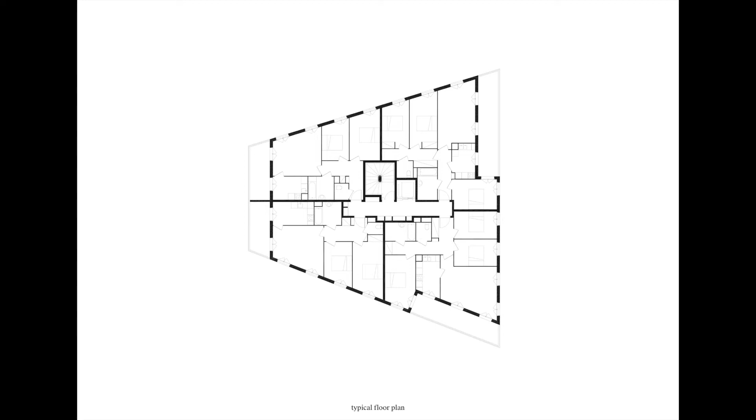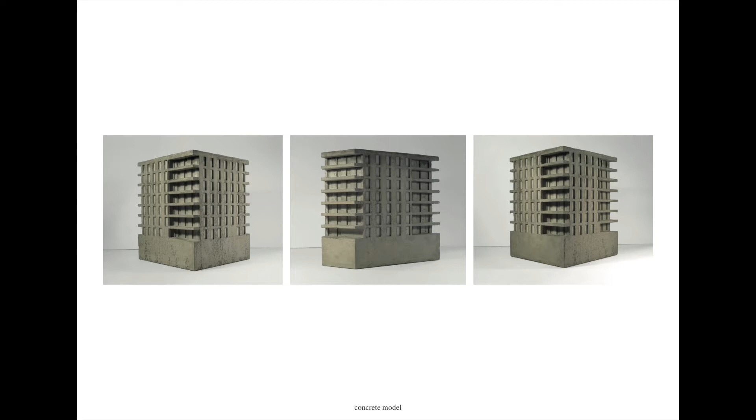And maybe, which is more important than the rest, this kind of intuition we had at the end of building this model, we said okay, let's try now to embrace and consider a little more. It was at the end of the project, a question raised at the end of construction. We said let's make a model that takes care of and considers a bit more the thickness of the building, and the fact that there's always something underneath what you build.

The process was to first look at what is traditional in the territory of Normandy, and to register the typical farmhouse that exists there. The way we wanted to abstract this object from this traditional form to another one was to double what we call la longère. Inside it, because of the new thickness generated by this duplication, we decided to integrate some interior protected outdoor spaces.

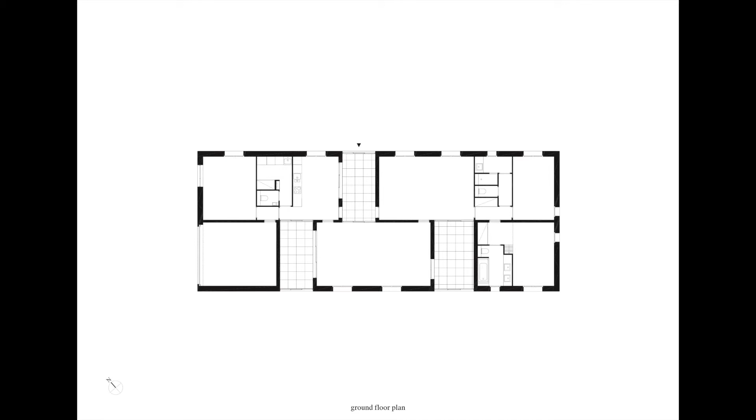The living room is now integrated and extended with these three outdoor spaces. This is an image from an outdoor space, a veranda totally protected from the outside, because in Normandy the weather is not really ideal for unlimited outdoor space. Facing the living room, on the opposite side, is another outdoor space.

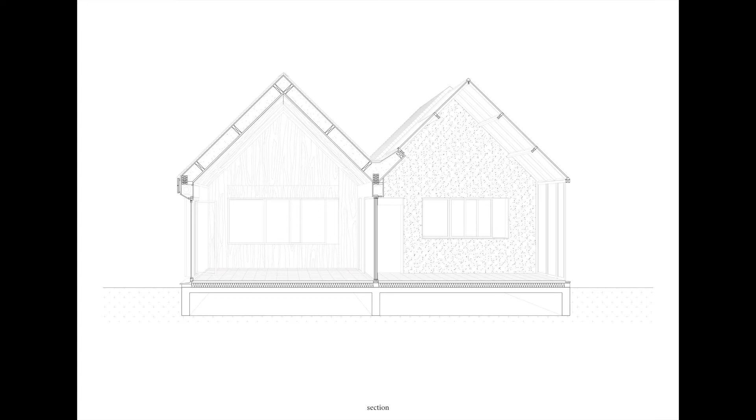Here, the building is built with a wood skeleton filled in with hemp, a material we're using more and more. In this case it wasn't far from the construction site, so we found a balance between using material that comes from not too far away—let's not be too local, because it very rarely comes from underneath the building, but not too far either—and the fact that the duplication of the building offered some newness, a step further toward abstraction. This balance between abstraction and the way a building belongs to a place through how it's built was maybe the beginning of a discussion that is now more and more important.

Another building is a 15-apartment building where construction is just about to begin, in Paris 18. Here we showed this axonometric view. Below are concrete slabs, concrete columns, concrete slabs and concrete columns. On top, which will embrace and surround the entire building, is an envelope, made with a secondary structure of wood skeleton, again filled with hemp.

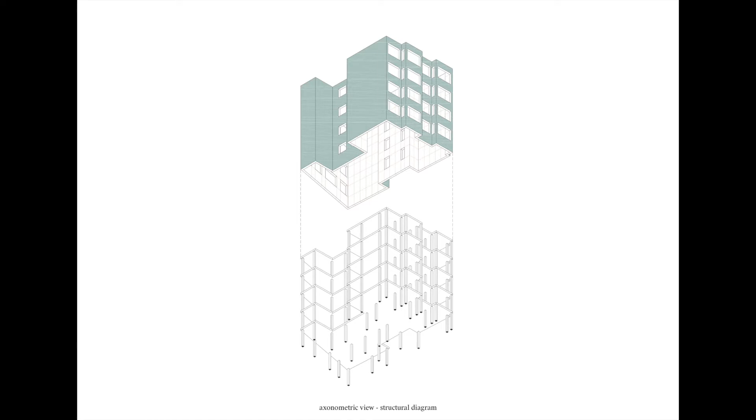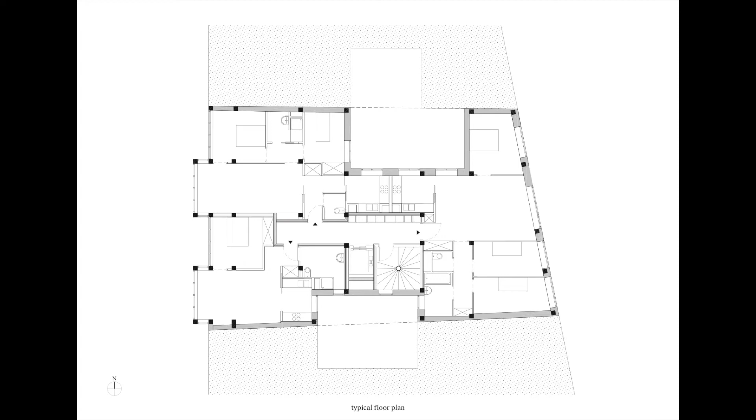And at last this building that we built, 17 apartments with stones, the construction was just finished last December. It's in Paris 11, Rue Oberkampf.

And of course, when we talk about the stone, all that we just said had more or less real implication with this notion of soil, of ground. And now, with the stone, we are more and more involved and interested, and this background is clearer and clearer for us. So to start this journey and explanation about the stone, we have to enter inside Earth, inside the planet.

So this is an image of the entrance of the quarry, a limestone quarry. This entrance we have was during the construction, right before the construction began. So we are keen on knowing that we have our ground above our heads.

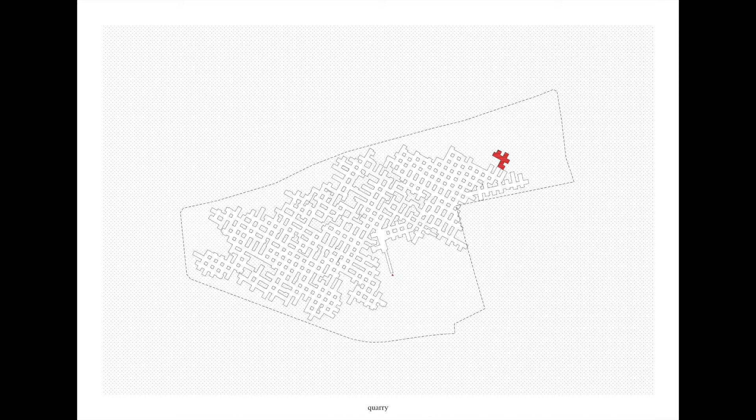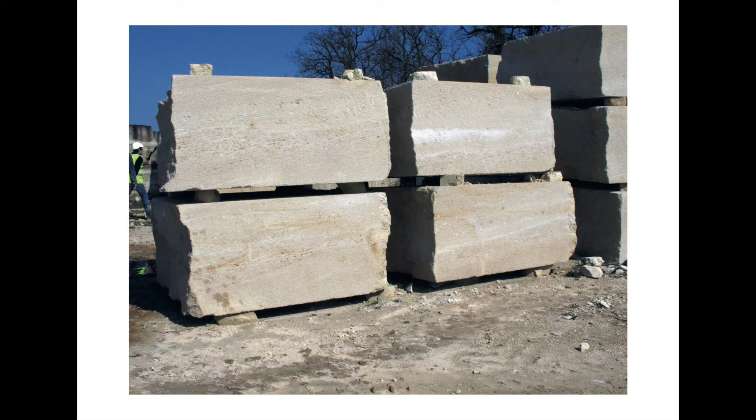And then here, the blocks that we did choose, this one for the prototype that we did for the facade, not exactly for the facade at the end. But what we are interested in here is this very particular moment you have with the stone—this material is very powerful for that—the fact that when you look at these blocks, it is somehow still part of the ground. It's still a fragment of the soil that has just been extracted, but also already in our minds somehow columns and lintels and jambs. This immediacy, this very obvious switch between that state and another one, is very fascinating, we have to say.

And it reminds us that we can also have the same kind of reading when you look at this image that we all know, just like the one with Mies at the beginning. But here it's somehow the opposite—you can still see the old ruins and the old temple, but you can also see at the same time the fact that the rocks began to be soil and begin to be ground again.

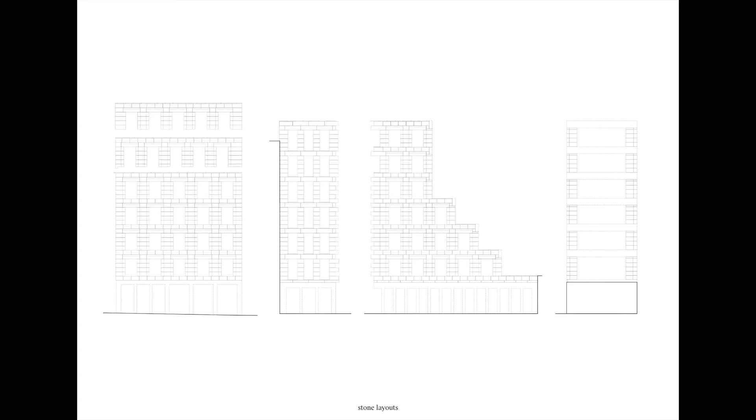The four stone layouts of the four facades—this one is the one on Rue Oberkampf, and the three other ones are facing the inner courtyard inside the plot. This was the discussion we had at the very beginning when we started working with a contractor, Entreprise Bonnel, which is a contractor from Angers, roughly in between Paris and Angoulême.

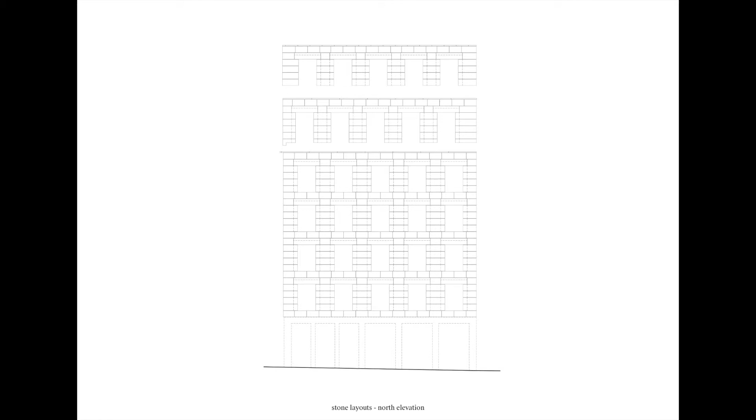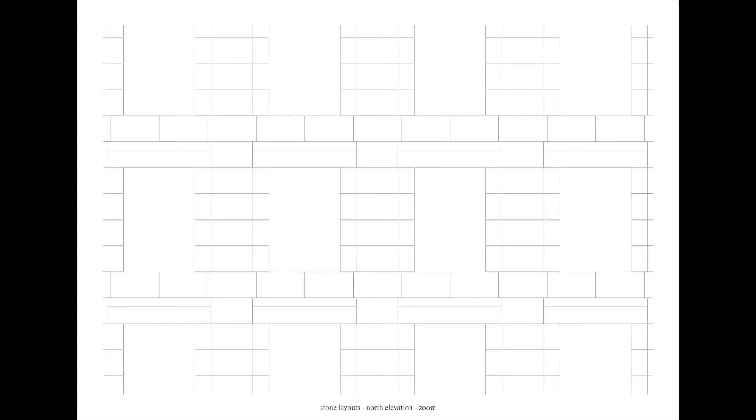And we realized—this is quite naive, but we realized when we started working with stone—that when you start laying out the different pieces and elements in the facade, you have to make a choice: either make a wall, meaning continuity, and then make holes inside the facades for windows, or on the other hand make piles and just stack stones one on each other. This second option is the one we decided to follow.

So here you can see the different elements. You have stones here, the lintel, another stone that links the two lintels—so that's one stone—and the stone belongs as well on one window and another one, and on another one. As you can see here, you have the piles, so four blocks for one pile, and two lintels held on one pile.

And the other process—this offset that we decided to do—again, to feed this ambiguity between being a column or being a wall, we decided that we should subtract a piece of matter to reveal the assembly, and the fact that at this very moment you have this ambiguity between the lintel and the column. So in this image, you understand that here we have the pile and this subtraction of matter—we get matter out, we cut off the material, rather than adding, as we will see in the image after.

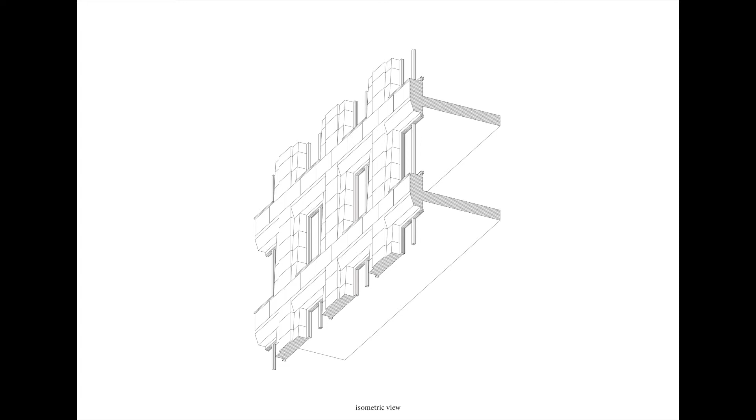We feed and illustrate this ambiguity that always exists when you build with stone between the wall and the column. Here we have this understanding of the old Haussmannian tradition, emphasizing the position of the elements constructing the window. Traditionally you'd add material to create a decoration on the facade, but we decided that in our times we should rather take material out of the construction to reveal and express this ambiguity between the column and the fact that we are a wall.

From above this time, because with this point of view you can more easily understand the situation of the building inside the plot. So an L shape with a gradin inside the plot to liberate and generate generous outdoor spaces for the apartments. Rue Oberkampf is here.

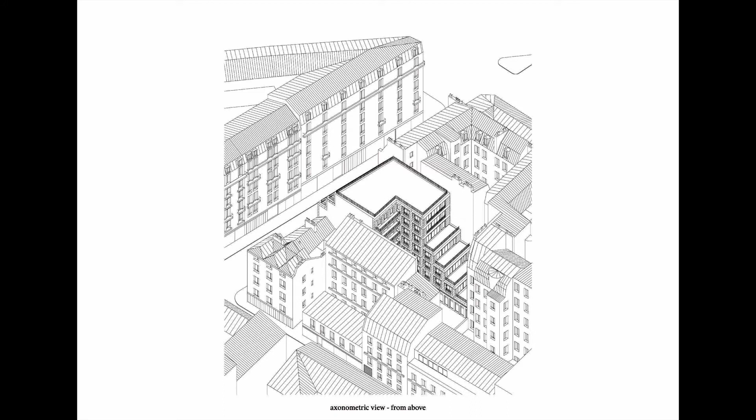The plan of Rue Oberkampf, with the gradin I was talking about, is organized in two parts. The first part has one typical floor plan made with a 3 bedroom apartment and a studio, and the other side on this floor has a 4 bedroom apartment, but each gradin takes a room out, so you start with 4 bedrooms, then 3, then 2, and then a studio at the top.

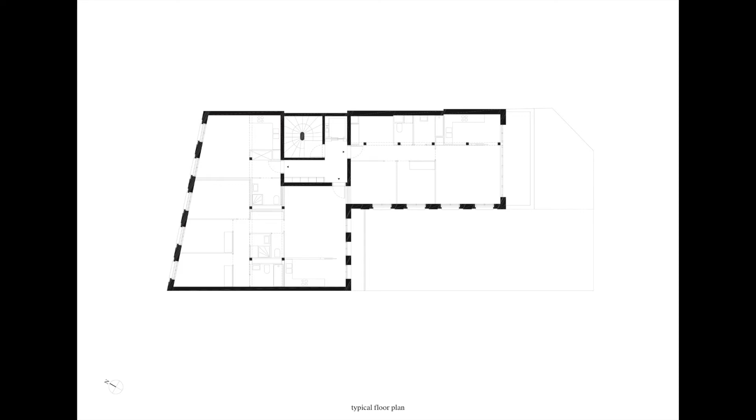Here we can see, before how it is built, we have these two structural lines with steel holding the massive wood floor plates that you can see here. So steel, the massive wood floor plates, and the wall made with stones at the end here, stones that are, of course, holding the building.

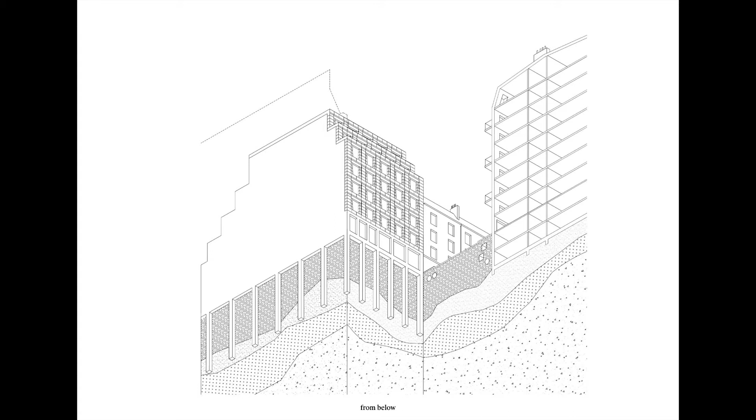Secondly, we thought it's interesting to keep a sort of dialogue between the stone and the concrete, and to maintain the possibility for both materials to exist and coexist together. This is something we're more and more interested in, saying that there's no much reason to reconsider this war that happened in the beginning of the 50s after World War II, where concrete kind of killed the economy of stone. We think a good manner for stone to exist today is to persist and coexist economically, but also in the way we think the building and the assembly.

And of course, the dialogue very easily exists when we sandblast the concrete on the basement, and it reveals the rocks inside, so you can very easily, aesthetically, provide some dialogue between the two materials.

And maybe a third reason was a more spatial matter. The way it's also very interesting to use concrete to develop some rooms and provide a better relation between the inside and the outside, which is something very modern, of course.

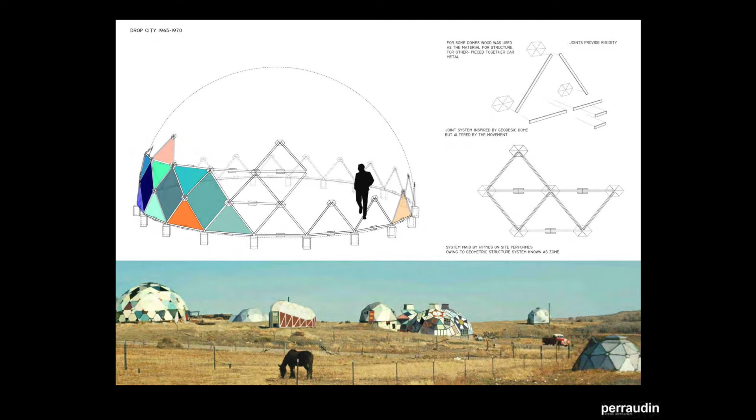In this way, I decided to work with André Ravereau, an architect who lived in the Sahara desert, and I followed him in his way of understanding situated architecture. He lived in the Sahara and built some houses, and he also received an award from the Aga Khan for his work. He built only 10 buildings in his life, but each one is a masterpiece.

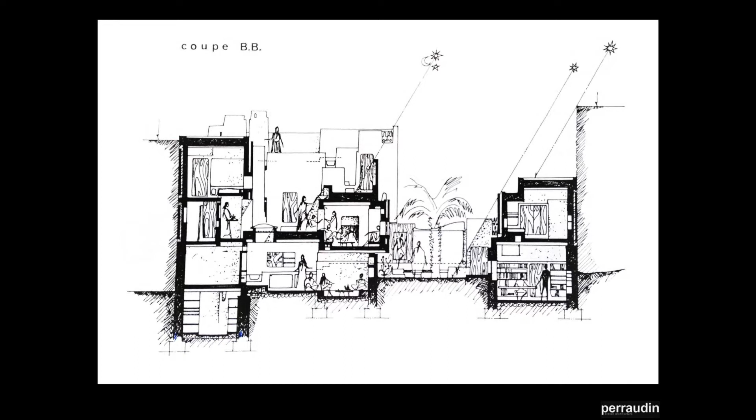I discovered with him the relation between climate, architectural form, and people, and how people lived in these houses. It was a very important experience for me as a student, not only because of the relation with natural materials - I will show you later why I came to build with only natural materials - but I think this experience was very important for me.

I think everybody here knows the problem of climate change, and how urgent it is to react against this problem. All the scientists now agree it's a problem caused by industrial development, which is responsible for CO2 emissions and pollution on the earth. It's because of this consciousness that I decided to build buildings with only natural materials, and I will explain why.

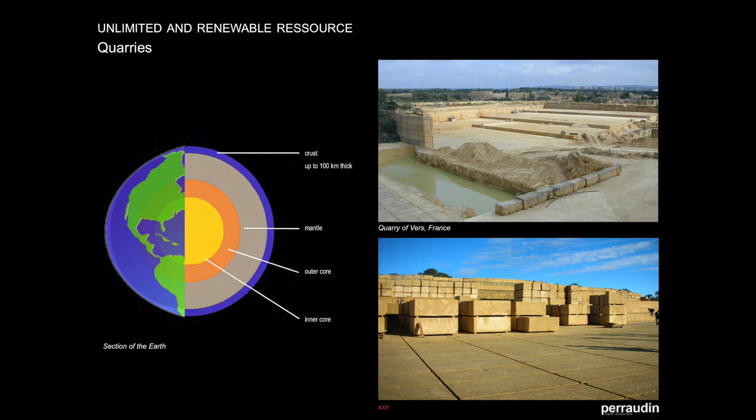And I decided to begin the process with quarries in the south of France. These are the quarries near the Pont du Gard, and you can see the huge blocks they cut at the quarry with a machine, very simply.

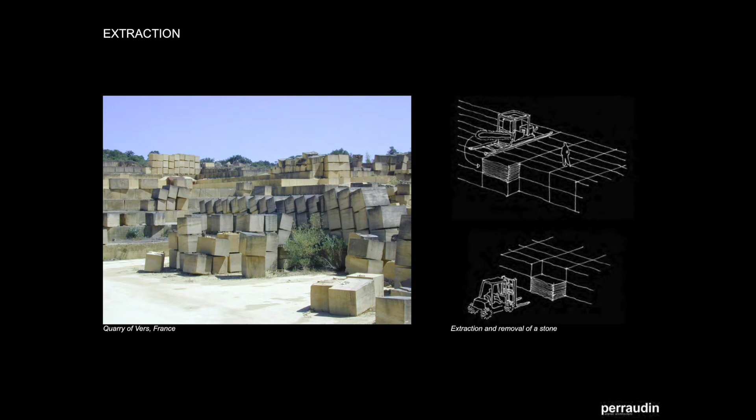You can divide the stone into smaller pieces. It's a huge block defined by the size of transportation, and then you can resaw this block into a smaller one to define a module, and it's with this module that I decided to compose and build my first building.

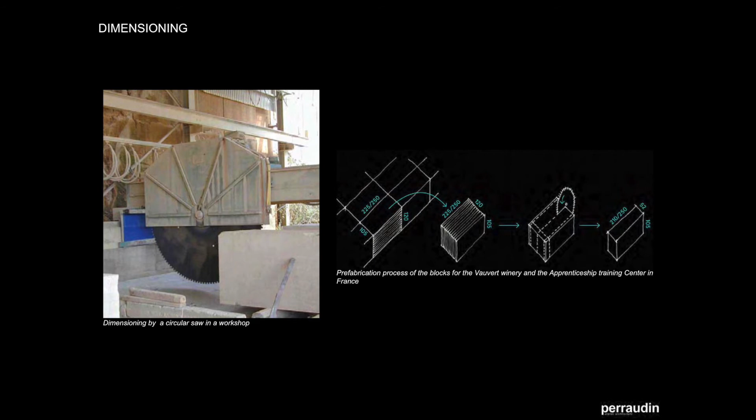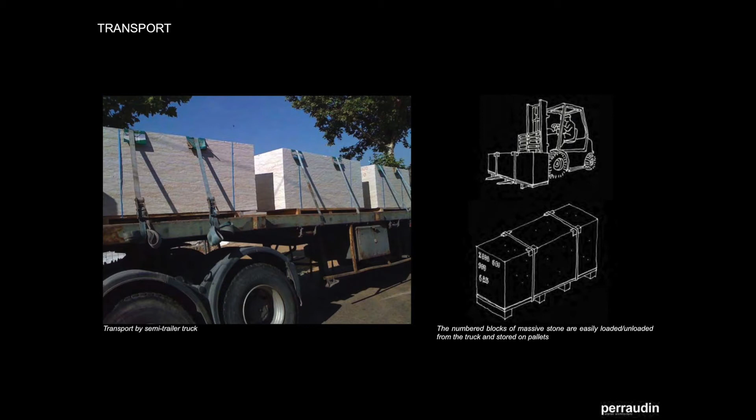The stones are carried by truck, maintained very carefully to avoid the risk of cracking. Then you use it on a building with a crane, and this scheme simply illustrates the way to take it and put it in place - it's only one operation. I discovered this through the experience I have with this kind of building, and here is some pictures of one of my buildings, one of my projects.

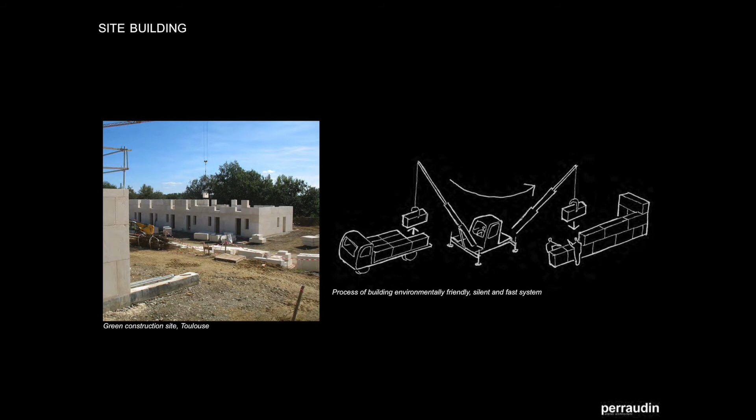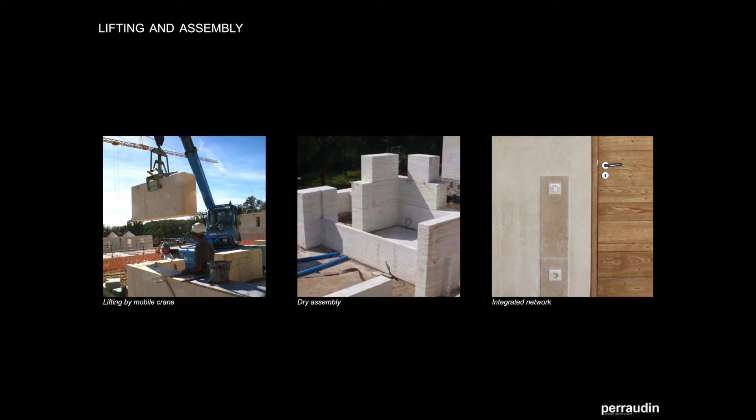This is not the same, but you can easily imagine that once you have put the stone in place, you have finished the building. You don't need any paint, anything on the surface - you have finished your building.

And after I decided to build with stone, using such a process, which as you can imagine is very strict, very simple, with nothing complex, because of the cost of each operation you make on the stone.

I decided, like Roland Barthes says, not to be modern. I think it's not important for me to be modern, and that's why it's important, because modernism is probably the problem of the architect. Don't say anything about modernism - it's a bad word, and there is nothing to do with that. Modernism is the problem of the architect, and we have to put in the trash all the books about modernism.

I will show you some of my projects, and I will show how, through each experience, I discovered one of the qualities of stone.

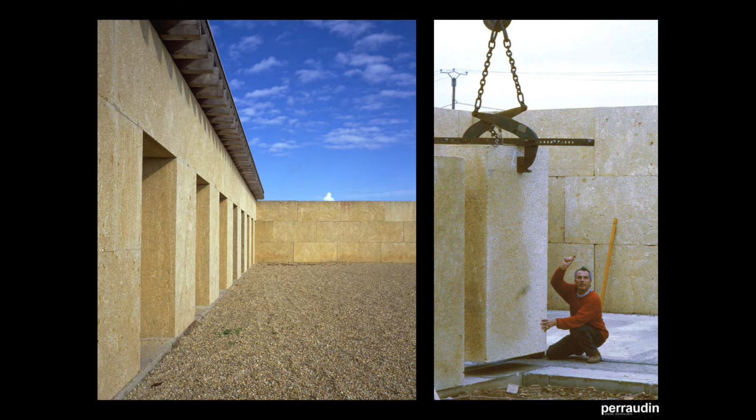First, reversibility. I don't know if it's the right word, but it doesn't matter. This was my first building, which I decided to do for myself, because I have vineyards in the south of France, near Nîmes, just on the Camargue, which is the Rhone delta on the Mediterranean Sea. And I discovered, because each day I built this building myself...

First, because I couldn't find a client, we decided to build with stone. Everybody told me I was completely crazy to build in stone now, in the age of modernity. Built with stone—completely crazy. The only client I found was me, and I decided to take the risk to build this building for myself.

This is a building without any concrete, except for a small footing—I don't know how to explain it. I can show you, it's just 5 centimeters high, just to make a flat place to put the stone, and there is nothing between each stone.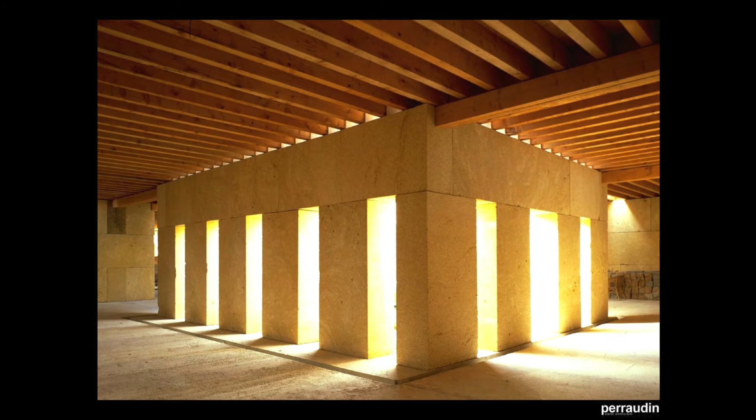I made this after construction, because I realized the wind would go through the building. I don't remember the name of the mortar we put on each stone—it's not for stability, but only for waterproofing, and also for the air.

And each day after work, I would wander around my building, and I'd realize something wasn't in the right place, and I'd decide the next day to change it—we'd take some stone and put it in another arrangement. It's very interesting to imagine and realize how easy it is to change. That's why I say that when you've built one building in stone, it's a new quarry, because you can reuse the stone from this building without any amount of energy.

It's very interesting, because there's a great difference between reused and recycled. With reuse, you don't need any energy to reuse something. But if you change it for, say, aluminium, you can recycle the aluminium, but you need the same amount of energy to make a new aluminium piece. That's why it's so interesting to imagine that you can change it.

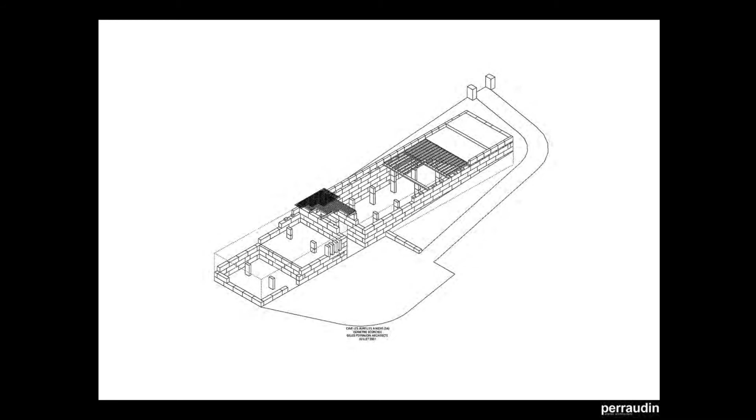It's also a very fast building, because it's a dry construction system. It's a project for a man with a very cheap budget, who wanted to build a metallic barn with metal cladding for a winery. We proposed building it with the same budget, but in stone, and we did it—this is the building.

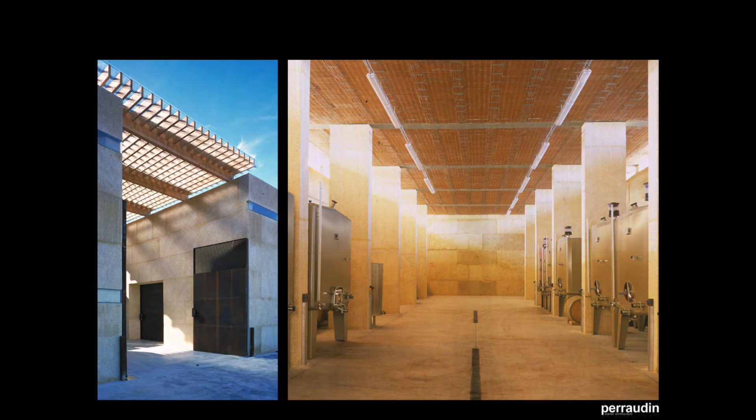It's very simple, in fact, to build with stone. Imagine, each stone takes 10 minutes to put on the wall, and you can build a very large building very fast.

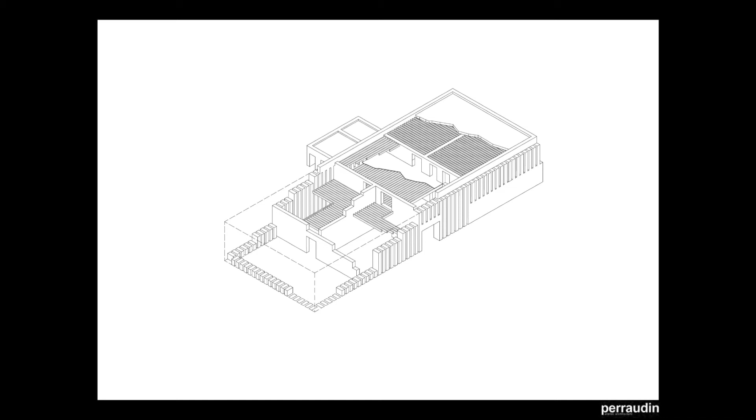I also discovered this for another project, a winery in the south of France, for religious women who lived in an abbey. They make wine not to drink, but to live, and they built it themselves—not exactly themselves, but by singing hymns for the men who placed the stone on the building.

But the people who built this building were carpenters—they had never built with stone before. This is the building, just near an old farm.

It's a building where the women work not only on wine, but also on jewelry and things like that. They need light, but at the same time they need to be protected from people seeing inside—that's why we have a very thick wall, one meter thick.

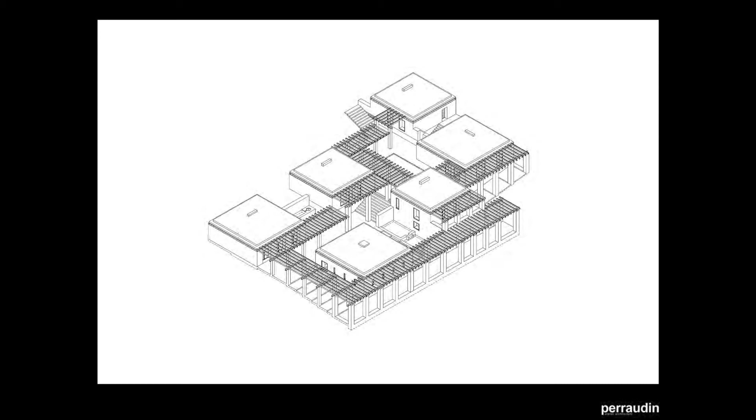And I decided to have for each function a building based on a square divided by 1/3, and we have two solutions. One is to have some office or some services on this place, which is on the north, or two columns here.

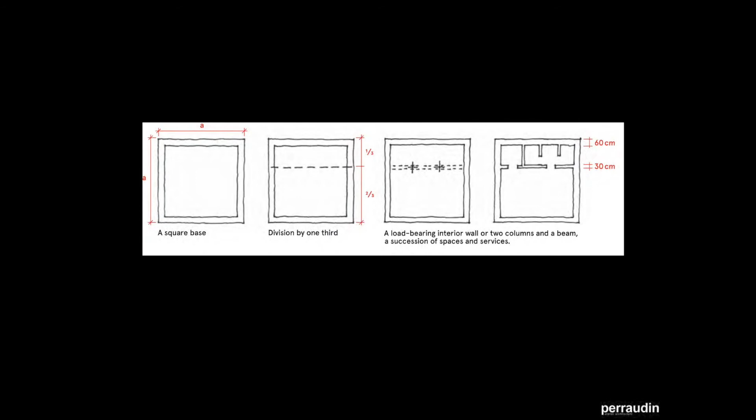During the construction, the first stone quarry we used had been closed, and it was a problem because of the delay. We decided to use another kind of stone. We found it in France, on the continent, and this stone came by boat to Corsica.

For me, you can mix different stone on the same building, and it looks like stone which was on the site just before, because Corsica is an island with many different kinds of stone, and on the same site you find different kinds of stone.

This is one of the stones from demolishing an old wall on the site, used as the basement with concrete, but with no iron, nothing, just very large, very thick wall to support the building with the stone. Each stone is 60 centimeters deep, and it's the only material used, except on the roof.

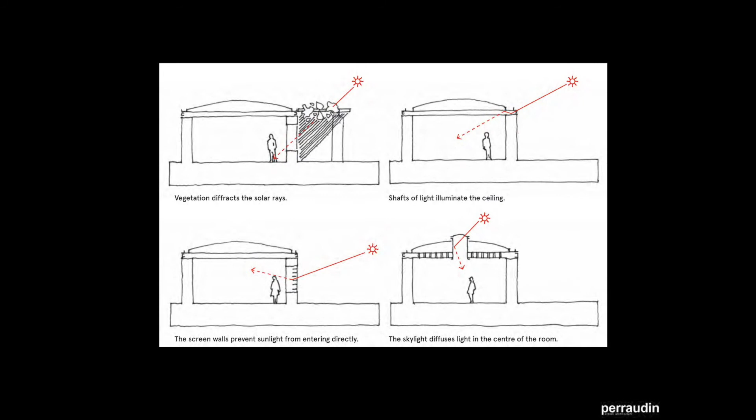There are different strategies to protect against the sun, like vegetation, and also some space between the wall and the roof where light can come in, some sun breaks also in stone, and some spaces that are also for ventilation but let light through.

This is a place where you find different kinds of light, some between the wall and the roof, to provide light to this roof, the sun breaks in stone, and this is the place where some light comes in just on this spot.

As you can see, the stone is rough. This is châtaignier, wood coming from Corsica, and this is also pine from Corsica, a very nice pine, pin laricio, which comes from Corsica.

This is a place where you have two kinds of stone, and also the light coming in shows the complexity of the building in an easy way.

What I mean by this is that with stone, complexity is very easy. I know it's perhaps a little contradictory with what I showed you, which is very strict, very simple.

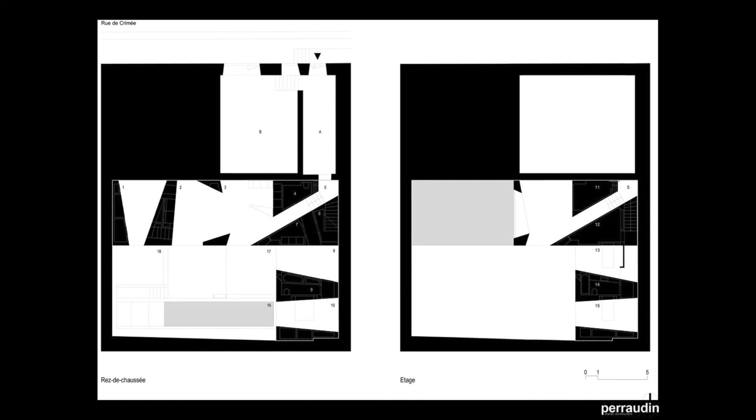Because of the very narrow dimensions of this plot of land, we decided to put all the services into blocks, like this one, and these blocks support the roof. To add more complexity, the roof here is not at the same level as this roof.

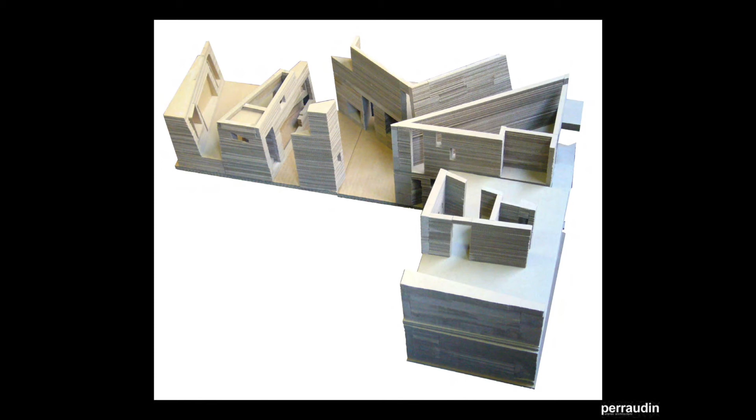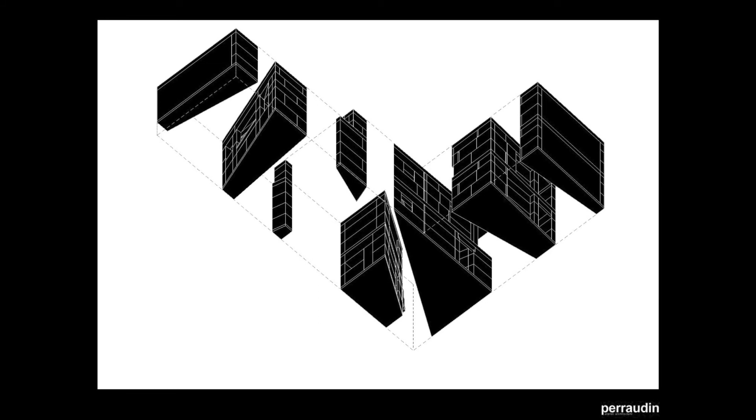This is the house, which is the result of strict building regulations, and it defines the shape of the house. We did nothing to imagine another shape, and between each block you have large glazed openings. The main rooms are between the blocks.

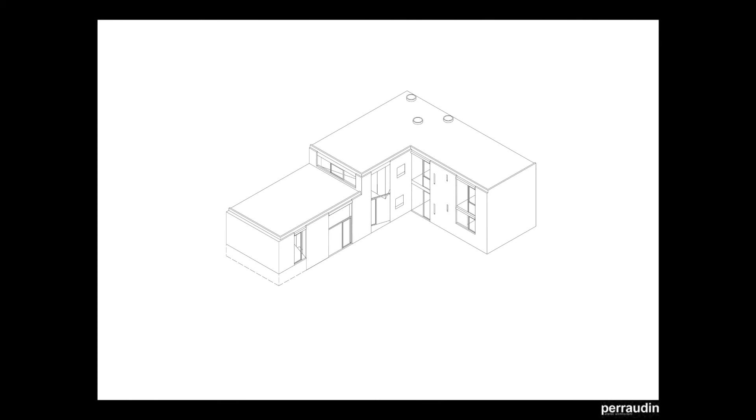And then when you are inside the house, it's like a promenade. You can go through the stone, through the blocks, and it's an experience because you discover some places to sit inside this block, or there is a different height of the place, and it provides different experiences.

It's like a landscape, a house lived like in a landscape, and you see the diagonals. All of these blocks are made by stone, and you imagine for each stone, each block, the complexity, because when you build with stone you have to define each block very precisely, since it's cut in the quarry and then put on a truck, as I showed you before, and built on site.

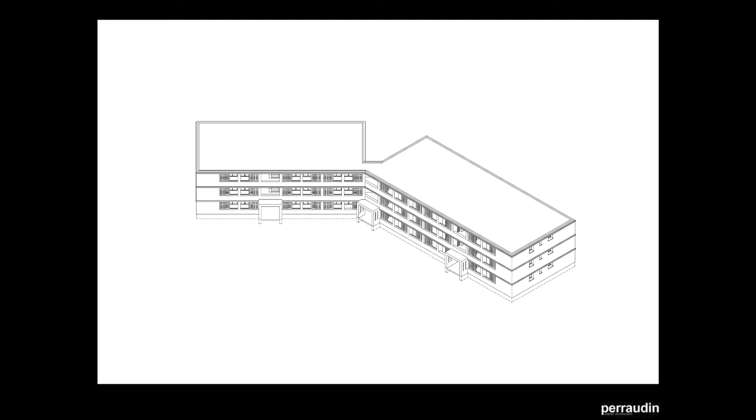The shape was imposed by the master plan, and okay, why not. We designed a house where each apartment goes through north to south to provide comfort during summer, where the bedrooms are in the north, the living room in the south, with a buffer zone. You can see it here, the buffer zone with large openings.

These are wood shutters. You can close this place or open it to have the sun. Here it's in winter, the sun is going inside the apartments, and then you can use it as a place to live during summer.

If you can open very largely these windows, the living room has around 20% more surface to live during summer, and then in winter during night you can close this part to make a buffer zone inside.

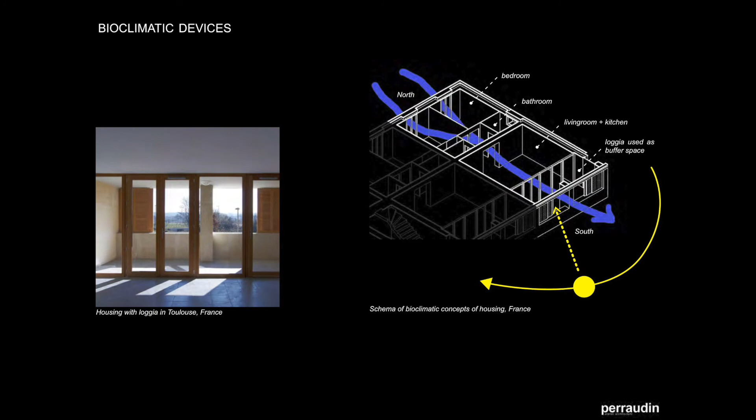At the same time, we discovered the great inertia of stone. It's a real question, very important, because now everybody says, and the rules say, that you need insulation. But if you have insulation, you really cut the quality of the stone, which is this inertia. This kind of stone is very soft, and it breathes and catches the humidity of the air.

During the night, the stone catches this humidity, and then releases it during the day to refresh the house. I think everybody here has experience of such a building, such a house, where during summer it's very fresh inside.

Okay, there is a problem during winter, but I will develop that if somebody wants more details about how you can protect against the freeze during winter.

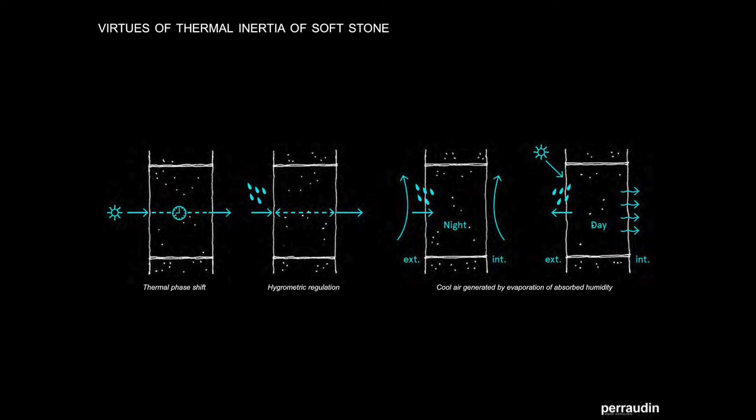So this is the building, now after three or four years after construction. It's a beautiful place with trees around, a very nice place near Toulouse.

And how you can see, people have closed their shutters or opened them, it's different, everybody's kind. During summer you see the shutters have been closed to protect the place against the sun during the day, and then at night you can open it and open the windows inside to make cross ventilation to refresh the house.

I will say also that each material we use in our building is without anything on it, any chemical protection. For example, here we use a kind of wood that doesn't need any chemical protection. It's natural, and it's the same for everything in our building - this is stone, this is wood, and also ceramic on the ground.

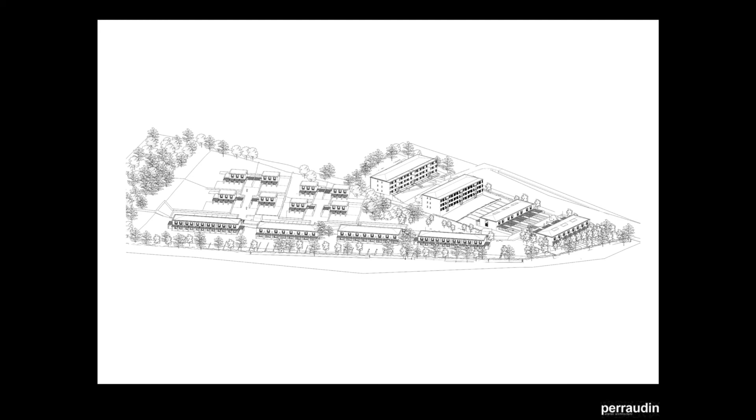And we have, you can see the buildings, we have to find quarries which are able to produce such an amount of stone to build.

There are around 80 apartments built in 1 year. And you can imagine how you have to cut all of this stone and then build it. But it's not really a performance. I will show you something just after to demonstrate that it's not really a performance.

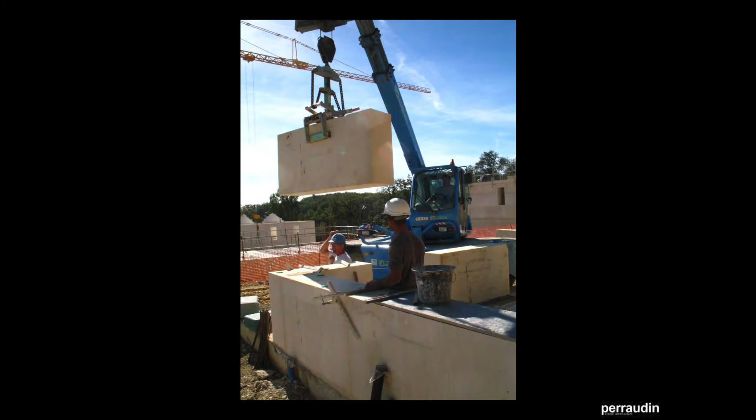This is the way to build the house. You can see stone put on another one. This is very simple. We have a design with a very precise building, just very small, with a staircase to go up, with two bedrooms.

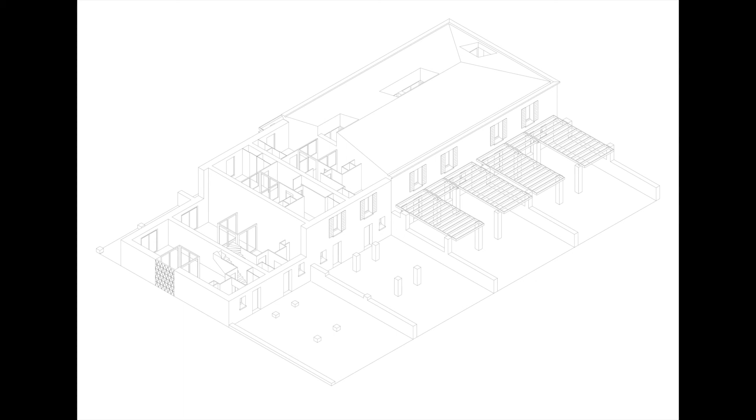There is two houses, different, which is very simple, with living room, place for the kitchen, and then there is two bedrooms with the bathroom here, but with a large... it doesn't matter. This is a place to put the cars outside, and this is a wood.

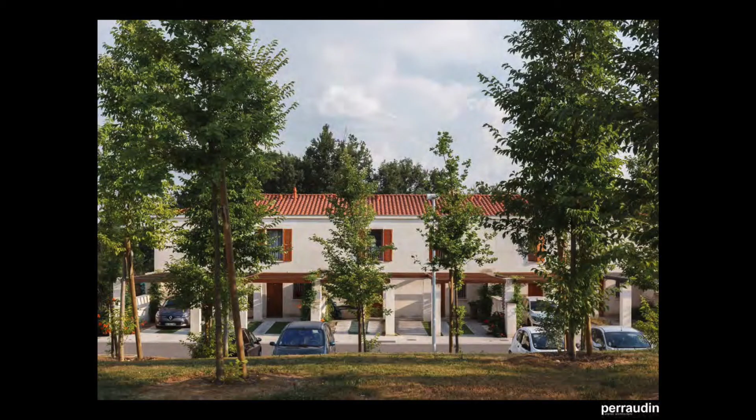This is a wood without any protection, chemical protection, and this is the stone which is just put with it. And now the trees are going to grow, and they make, and then also flower, with this place to have climbing vegetation to protect this and to mask it in the same time, to hide it, because it's not very nice.

And you see this is the building, very simple, with living room at the basement and bedroom on the upper part.

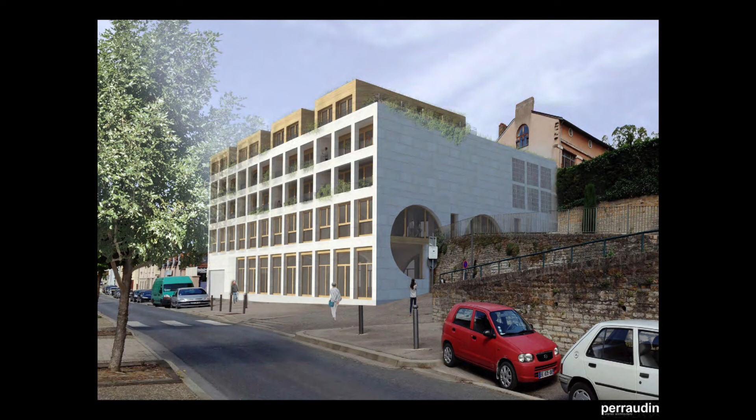It looks like this is Lyon. This is some picture of a place where this building will be built. You can see in the Croix-Rousse in Lyon, the hill of Croix-Rousse, there is a building in stone. I think you can imagine, yeah, there is 30 to 40 meters high, which is very high.

And the basement made with rough stone, on 3 levels for this one, and then it's stone masonry, and this is in Croix-Rousse. There is, all the old buildings are very high because it was the place where people...

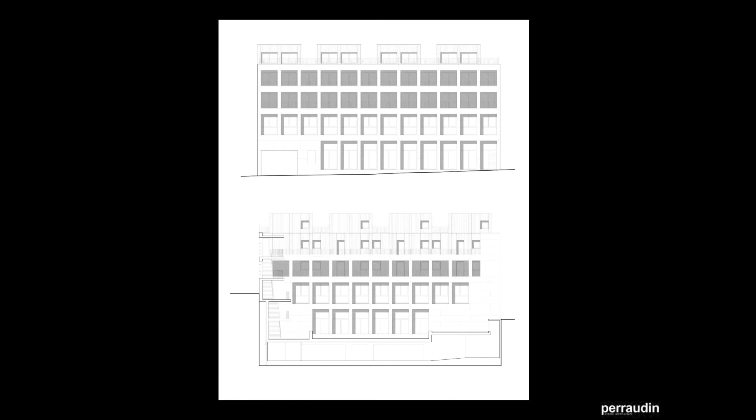And then this building, we try to build to avoid any concrete on it. We can discuss about concrete, which is the material that is going to destroy the planet, and it's why it's very important to discuss about concrete, because it's impossible to recycle the concrete, but we can have a discussion if you want about concrete.

And we try to make all of the structure on it in stone, and we rediscover the quality of the vaults, and you can see here the vaults inside the building, to support all of the stories.

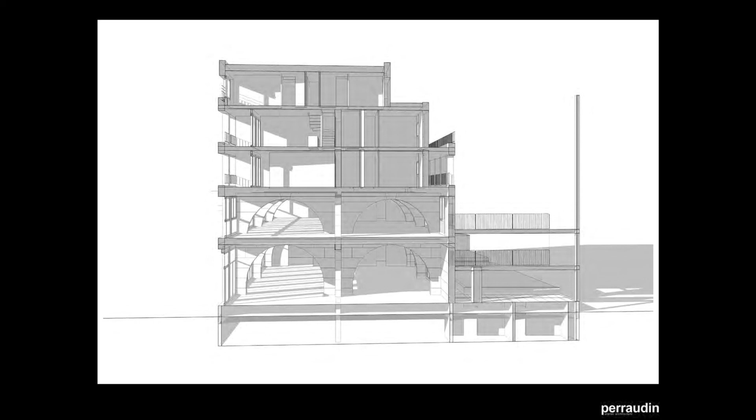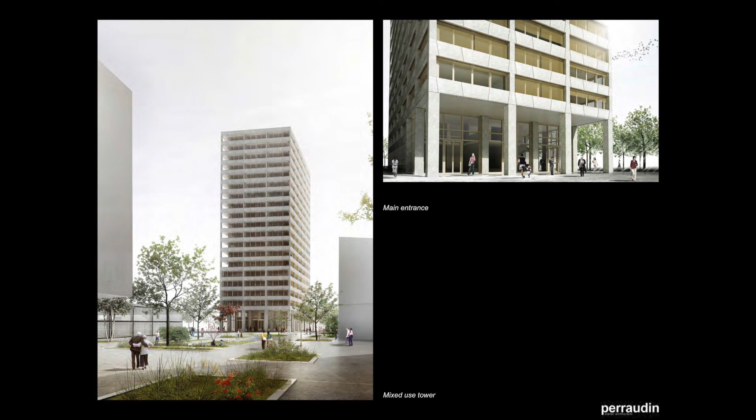And this is now we develop some project in Switzerland. This is a competition. Unfortunately, we don't win this competition. It's a tower, a very small tower of 65 meters high. And we decide to make it entirely in stone.

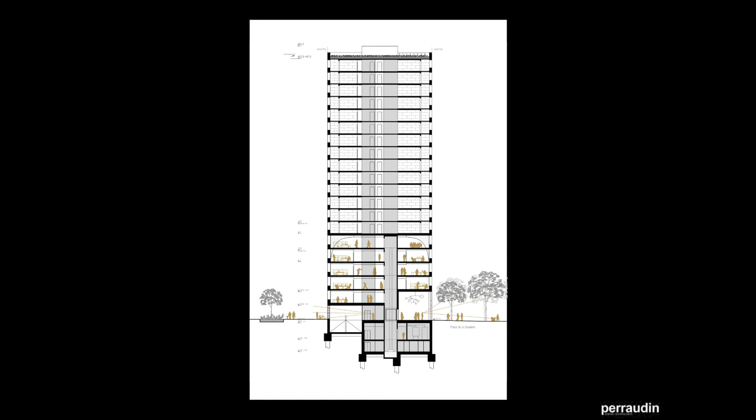This is a building built by Fernand Pouillon, a French architect. We have built many buildings with stone, with rough stone, and this is a 60 meter high building in Alger, built around 1960. No maintenance on the building until now, nothing, and there is no problem. And you know that Alger and Algeria is an earthquake zone. There has been earthquakes in this part of the world, and as you can see, nothing happened to the construction.

The structure is very soft, and you can imagine during an earthquake you can move without too many problems. And this is how it is without any maintenance during 50 to 60 years.

There are some studies made now in Zurich, at the School of Polytechnicum of Zurich. They have demonstrated that such buildings built with stone are incomparably the best for sustainability, because there is very little energy needed to build the building at the beginning. And even if you have simple glazing for the building, if you study the CO2 emissions over 50 to 60 years of maintenance, it's impossible to compare with other buildings in concrete or made with double or triple sheets of glass.

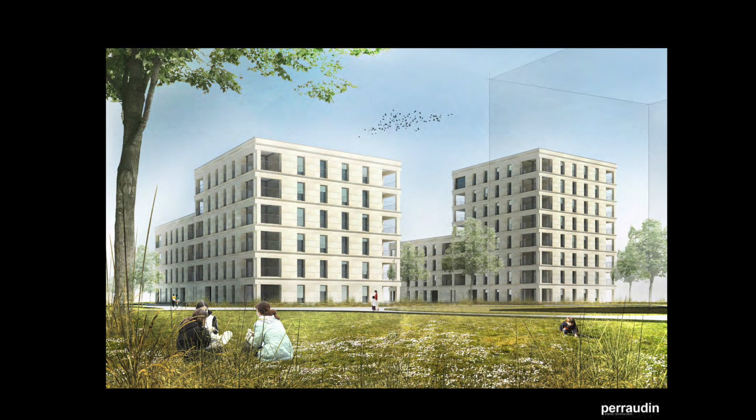And we are now doing studies of such buildings. It's social housing in Geneva, which is built entirely in stone, not only the facade but also inside. And the facade and inside supports all of the flats.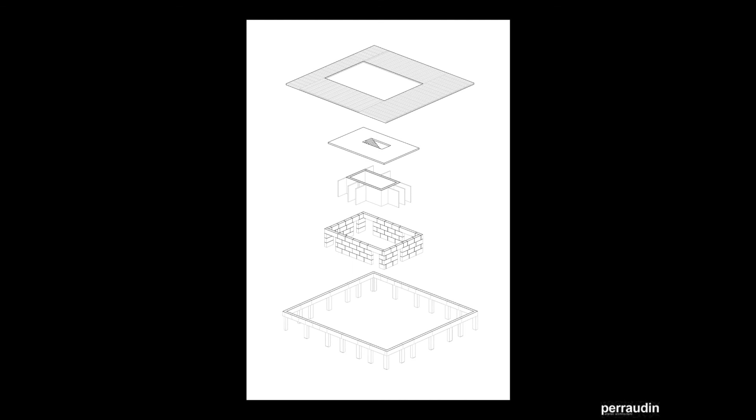This is the building with the supporting elements in stone around, and then inside there is a core which is in stone, and this is the place for the stairs, the distribution.

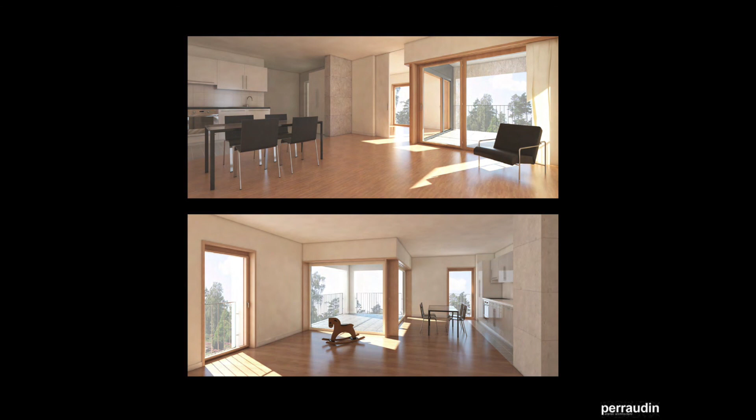At the beginning, we imagined that perhaps it would be better here. This is stone, and here imagine to have a wood structure. But because of the organization in Switzerland, we had no good engineer with us, and it was difficult to convince them to use wood on a building with a very low budget.

But now it's concrete, unfortunately. This is the building. These are images of the inside.

I will finish my lecture by speaking with you about workshops we organize with my association, which is l'Académie de la Pierre. Every summer I organize a workshop where young students or young architects come with me, and we speak, as you can see in my building, about how to build with stone.

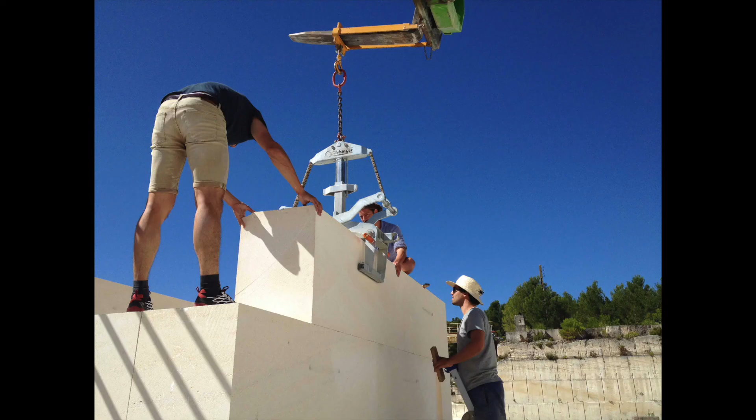During this moment, these 2 weeks, we share together. We develop buildings using stone, only with models, without any computer or something like that - it's a problem for architects, computers, as you can see outside. And also to experiment how to build with stone.

This is an experience in a quarry with my friend who owns quarries, and it's the same quarry where Fernand Pouillon took his stone to build in Algeria. I said that it was not a great performance to build around 100 units in 1 year, because Fernand Pouillon built some buildings, and the first one he built in Algeria was around 800 units in 1 year, and the stone was coming from France to Algeria. So it's not really a performance for me to build just 100 units. And this is the same quarry where Fernand Pouillon dug and took his stone.

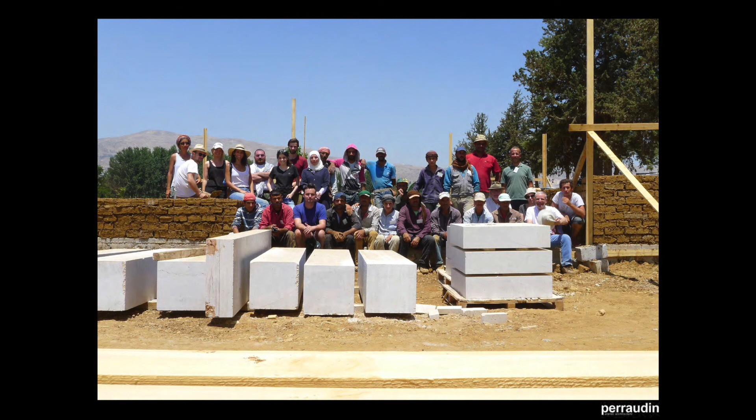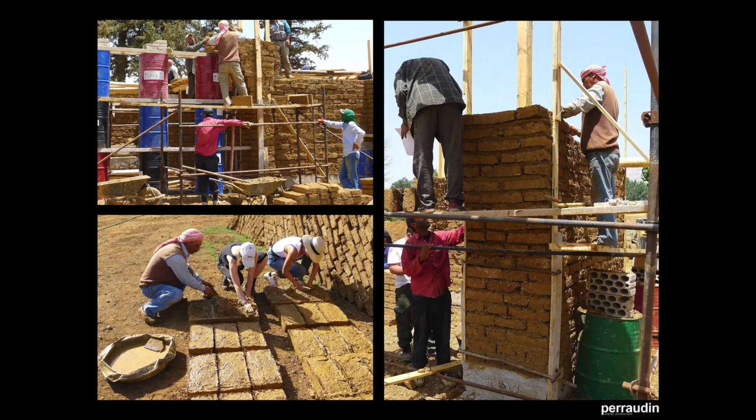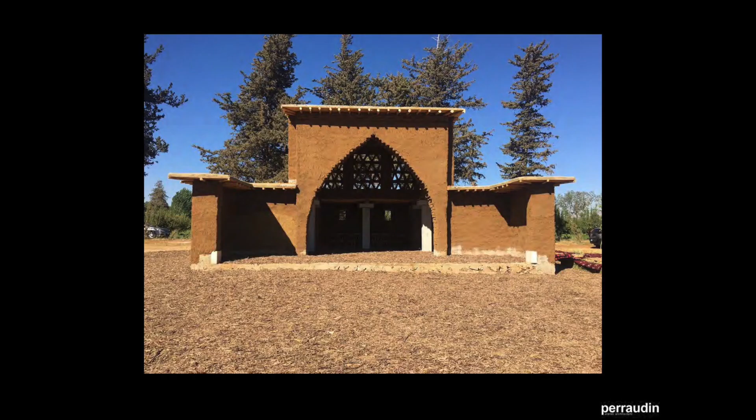And we organized last year during summer also to build with natural materials, because I showed you the building in stone, but I also develop buildings in earth and in wood. This is an experience we made in Bekaa Valley in Lebanon, with all of the team. We built a building using earth, but also stone. You can see the stone in front of the picture, and during 2 weeks we built this building of 2 levels. It's a kiosk for music in a very beautiful place of Bekaa Valley.